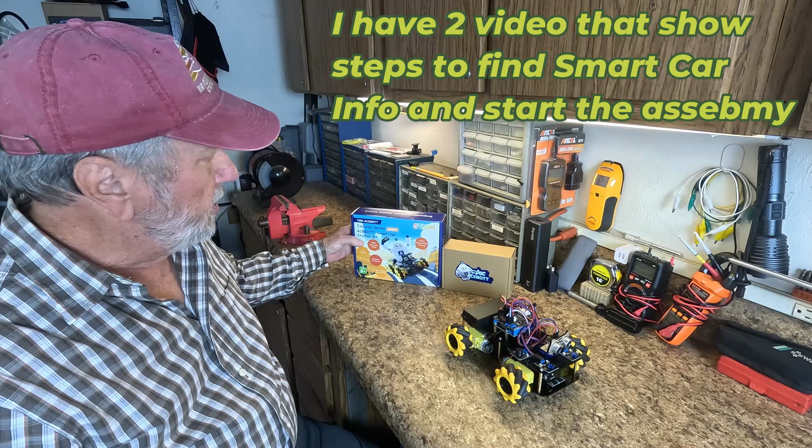Hello folks, Sam Owens here, and we have the ACEBOTT smart car right here, and this is one half of the product that we ordered, which is the smart robot arm car kit, four-wheel drive, with the car, the smart car. So we've already completed the assembly and programming of the smart car, which is this box right here, and it's product number QD001.

All of the tutorials, assembly instructions, and program instructions are in documents with this listing. When you order this product, you're also going to get this in the package. This is the robot arm right here, and it is QD007. The instructions for assembling the robot arm, programming, and tutorial will all be in these documents, and you're going to have a list of products that you can select from.

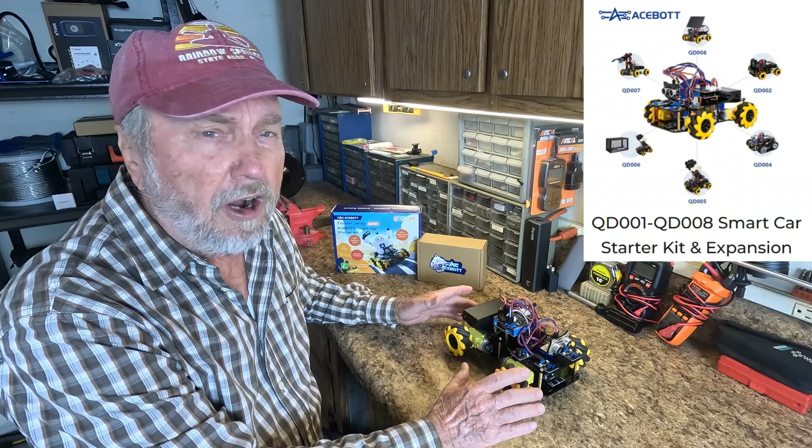You'll need to build the car before you go to this point, because the assembly instructions are going to tell you to disassemble some of the car in order to attach the robot arm. It's going to attach right in this location, so all of this has to be removed. The instructions are there to guide you as to what to take loose. You have to take this top portion off first, and then you'll be able to get to the screws and everything to take these components off to give room for the mounting of the arm.

First thing you should do is assemble the car and get the car working and have a little fun with the car. Then you start building this.

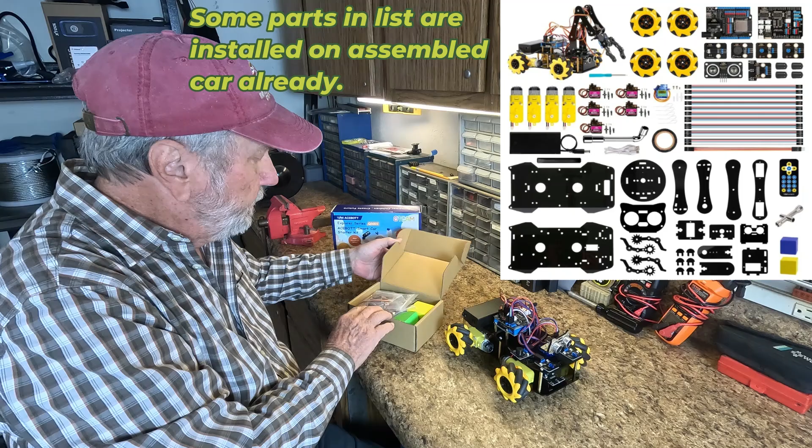Okay, let's begin by looking at this box. All of the components you need are in here. There's servos - you get 5 of these servos to control all of the joints. It's going to be a wrist, an elbow, a shoulder, okay?

And you get a couple of little blocks here, which are going to be something to pick up with the robot arm. I'm just going to take it all out of the box, and when we actually go to the assembly, I'll be laying these out in some form of organization so I can find things.

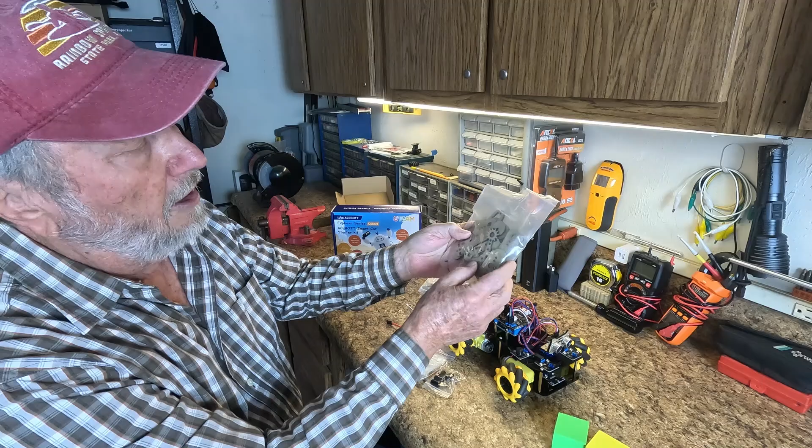You got hardware, lots of screws. This is a hardware package. They're all labeled, easy to find. And then you have the arm construction itself. This is all of the components of the arm. See how to begin with that.

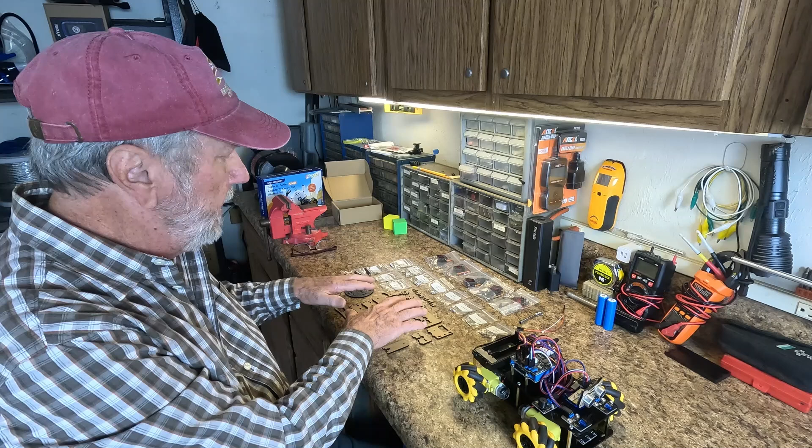Okay, the first thing you'll want to do is take the parts out of the box there and organize them in like-type areas, like the servos are here, 5 of them, and also your screws and nuts, and also any other little parts that go on there. And then the arm pieces themselves will go right here.

All these light colored pieces have a protective covering on them that's adhesive, that each of those will need to be peeled off. So you could start and peel all of that off ahead of time so that's out of the way. It's just a matter of grabbing this with your fingernail or some sort of tool that you can grab an edge with, just like that. And then once you get the edge, you can peel, and they'll come loose. You just work it loose so it doesn't tear, being careful with it and pulling it off like that.

And there's a little piece that tore off, so you can just kind of scrape it off there. Alright, do that with the rest of those on both sides, and you'll be ready.

Also, you'll need the car, and take the batteries out of it so you don't have any issues with power on the car. And we're going to get the information we need, and I'll be showing you that.

First thing you'll want to do is, just like you did with your smart car building it, come to ACEBOTT.com and go to tutorial, download tutorials, click on that, then select your product, which in our case is the robot arm, which is QD007.

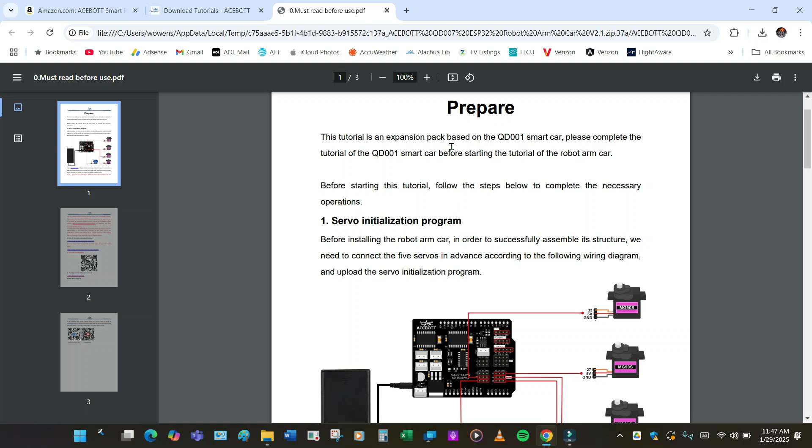It's talking about the need for certain types of information. Right here is going to talk about this, so you need to read this. I'm alerting you that there's must-read information before you begin, so we'll do that.

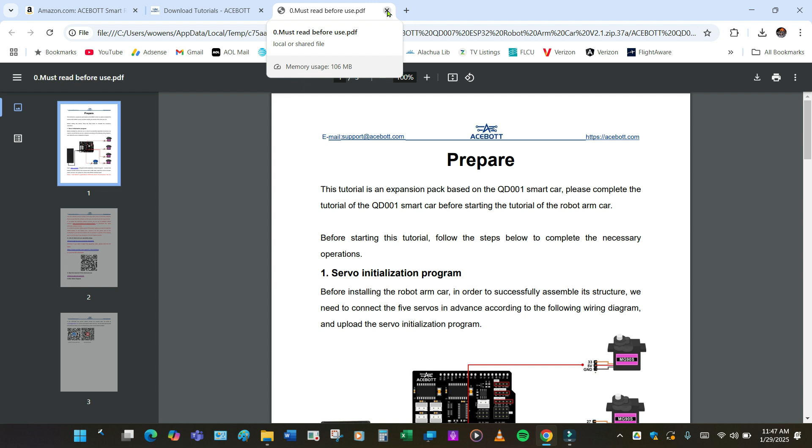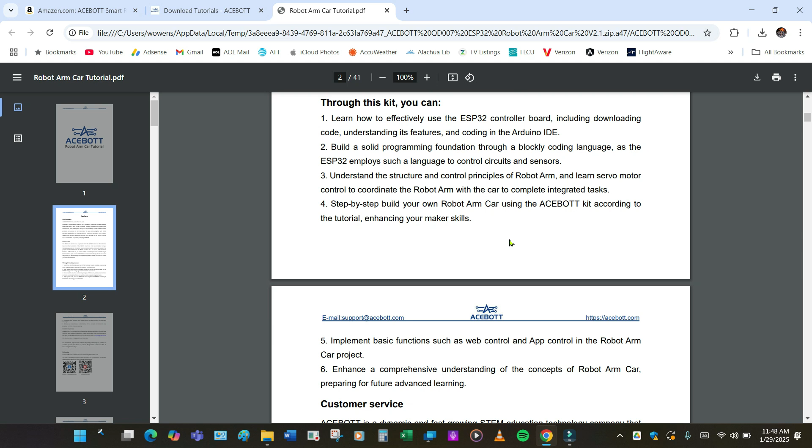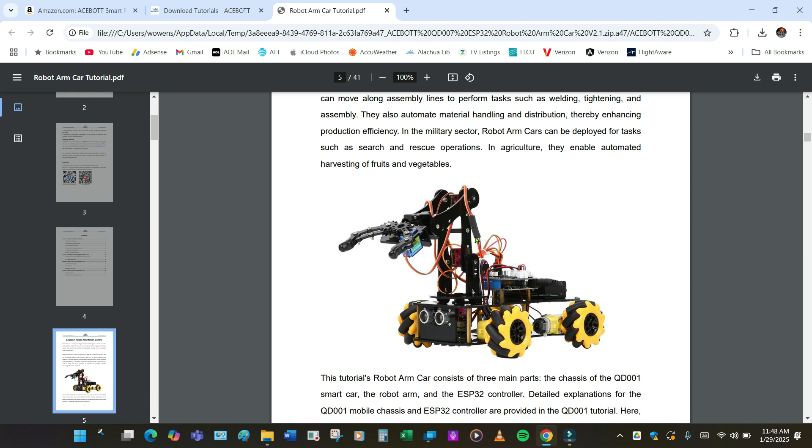They even have some videos that you can watch, an index, and right on down, this is what the car is going to look like when it's finished. And here is the assembly.

This will be the first place that we actually go to find out how to set up the arm for installation. All right, this is step number one, and this is how it's laid out.

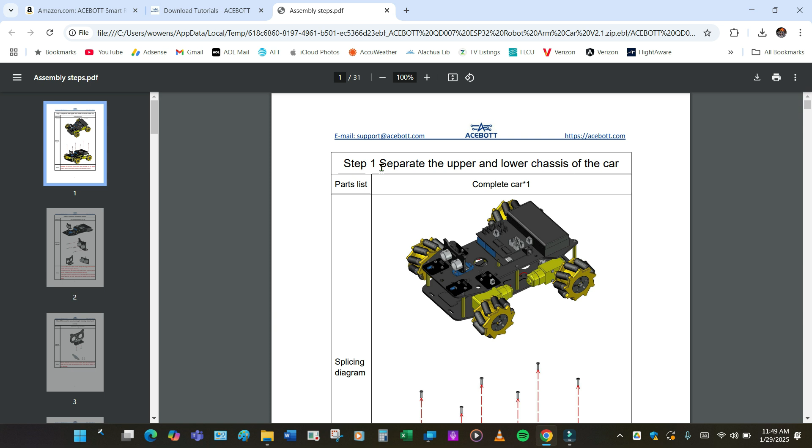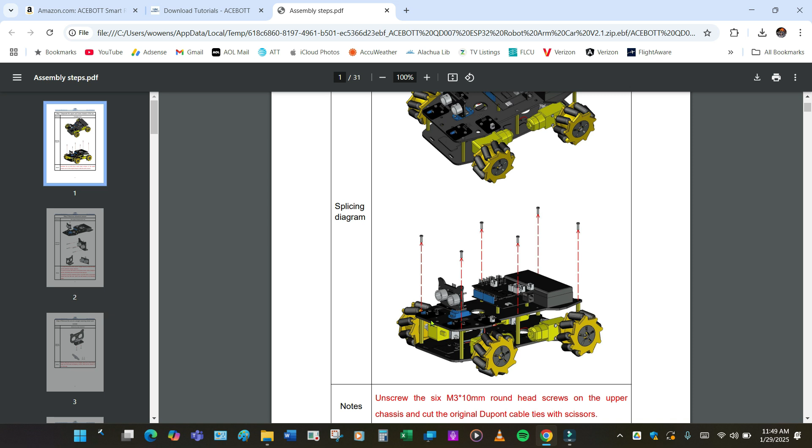Just like in the car, they had steps, they had a parts list. You need the complete car, and then they're showing you removing some screws to remove the top assembly from the bottom assembly, and they have notes in there which direct you with some special installation instructions.

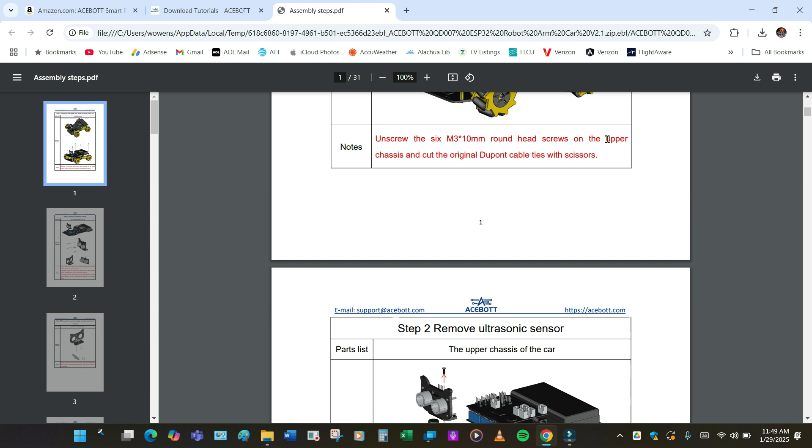So you want to read all of this and follow it to the letter, and don't try to take any shortcuts. We will start at step number one.

Okay, you should first go to the must-read first and perform the servo initialization as shown here. The read-first instructions will describe exactly what you need to do to accomplish this.

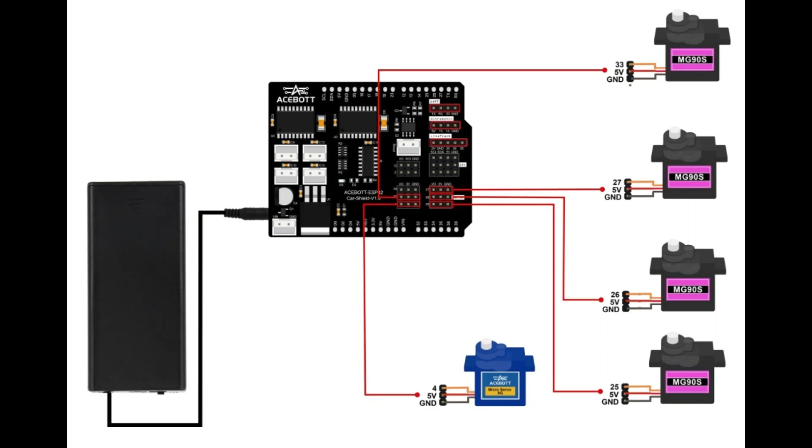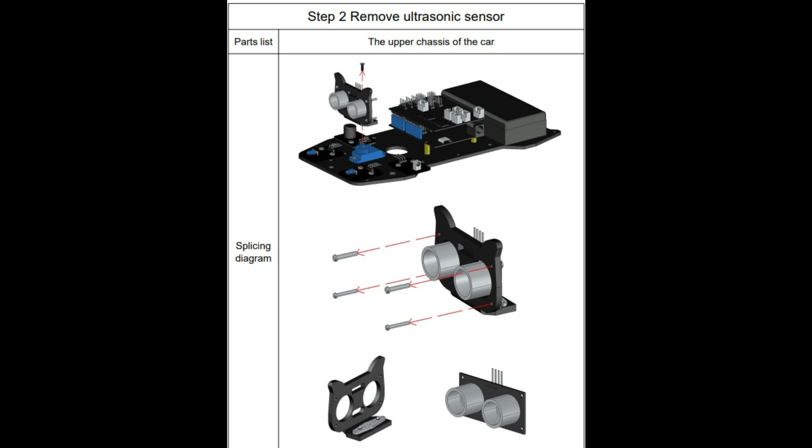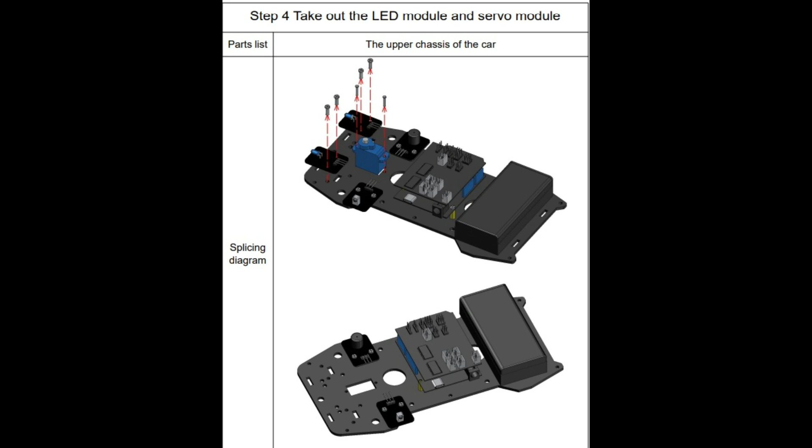Now we're going to take a look at the assembly steps. There's 30 of them, and you could just follow through and just get an idea of what is going to be shown and how to put the robot arm together and install it onto the car platform.

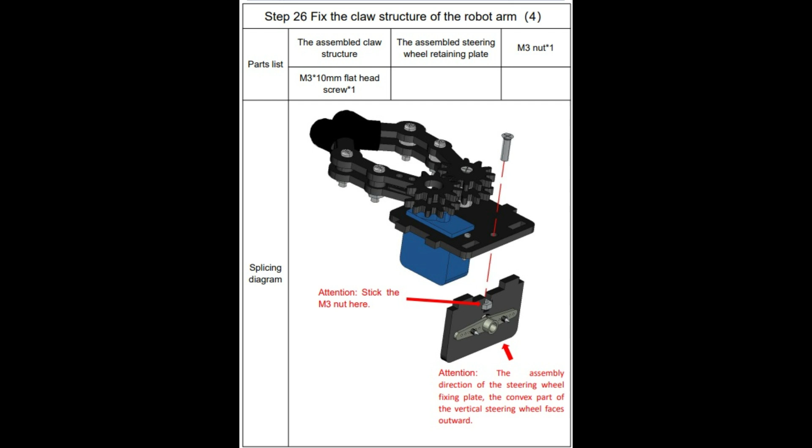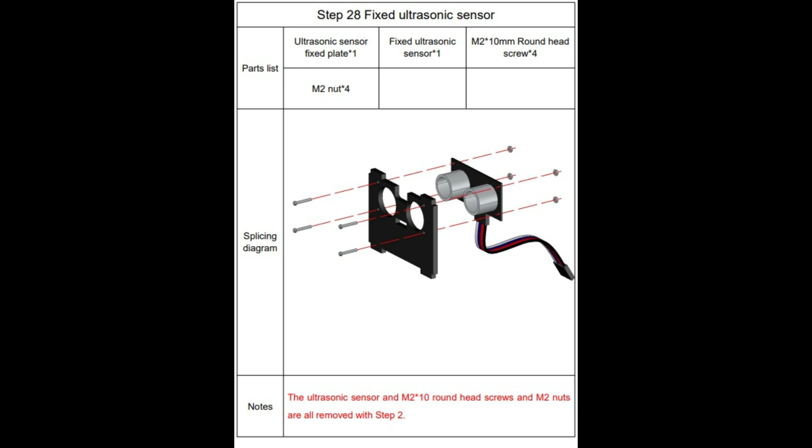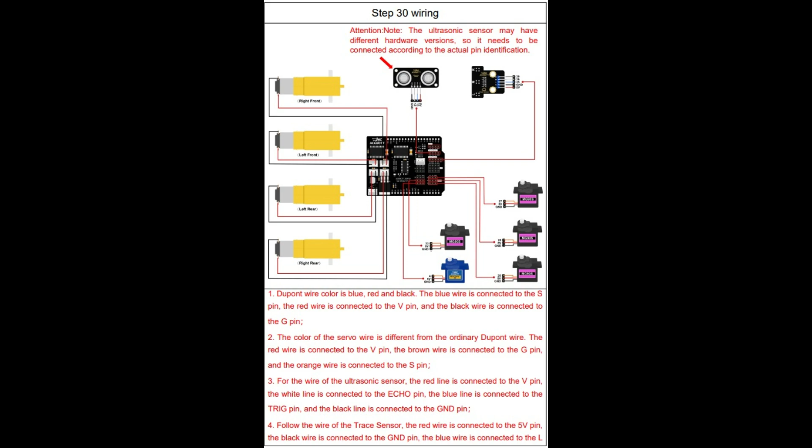It will be very important to hook up the wires according to the pin designations and colors. So watch that very carefully.

Okay, you should follow the tutorial very closely for the progress of steps that you need to take to assemble the robotic arm.